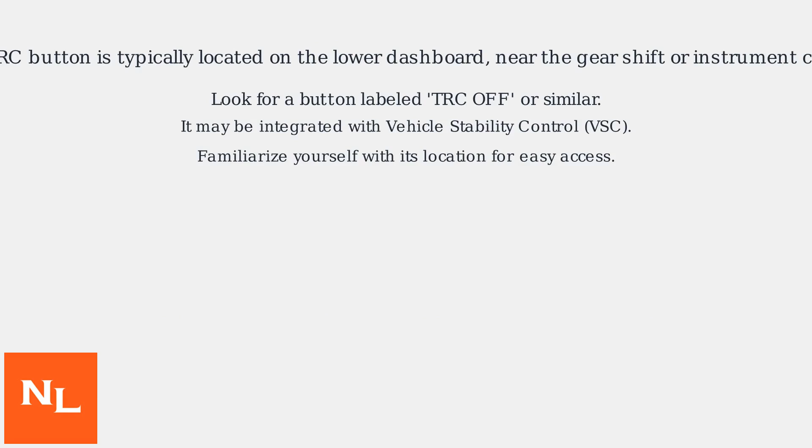The TRC button is typically located on the lower dashboard near the gear shift or instrument cluster. Look for a button labeled TRC off or a similar designation. It may be integrated with other controls, such as the Vehicle Stability Control (VSC) button. Familiarize yourself with its location for easy access.

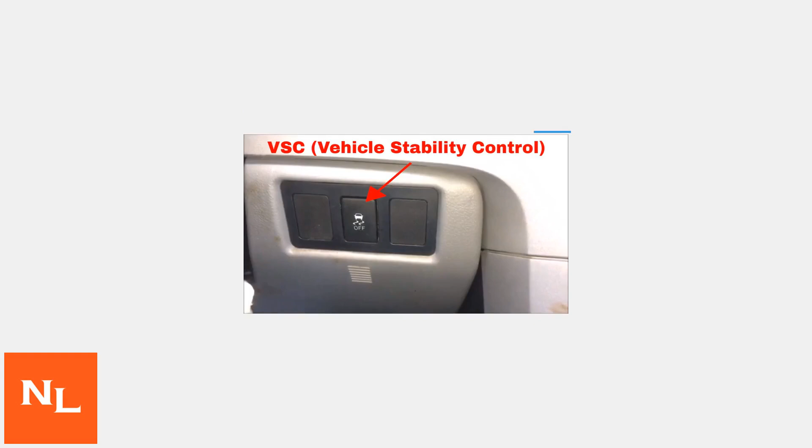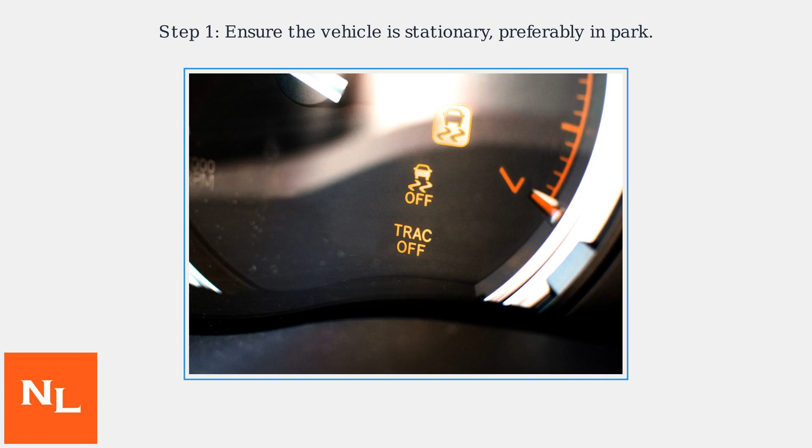To disable TRC, first ensure your vehicle is stationary, preferably in park. Then, press and hold the TRC off button for 3 to 5 seconds. An indicator light, often amber and shaped like a car with skid marks, will illuminate on the dashboard, confirming that TRC is deactivated.

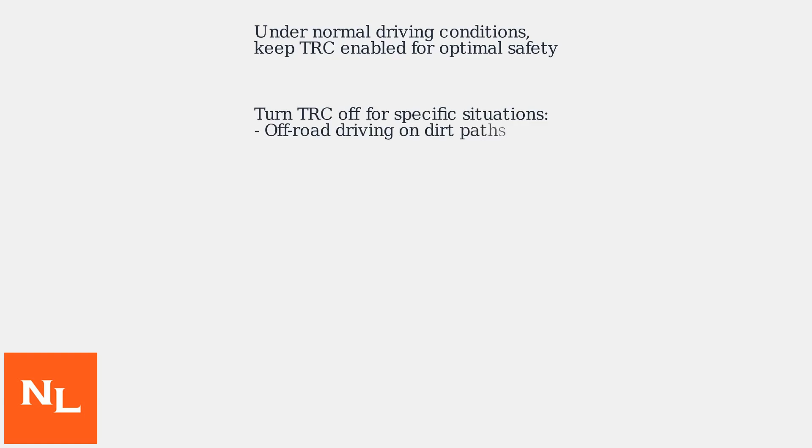Note, disabling TRC can reduce stability, especially on slippery roads. Turning TRC off is generally recommended only for specific situations, such as off-road driving or when attempting to free the vehicle from snow or mud, where wheel spin is needed to gain momentum. Under normal driving conditions, it is best to keep TRC enabled for optimal safety.

To re-enable TRC in your Toyota Yaris III, simply press the TRC off button briefly again. The indicator light on the dashboard should turn off, signaling that the traction control system is now active and functioning properly. Always verify that the light is off to ensure the system is fully engaged.

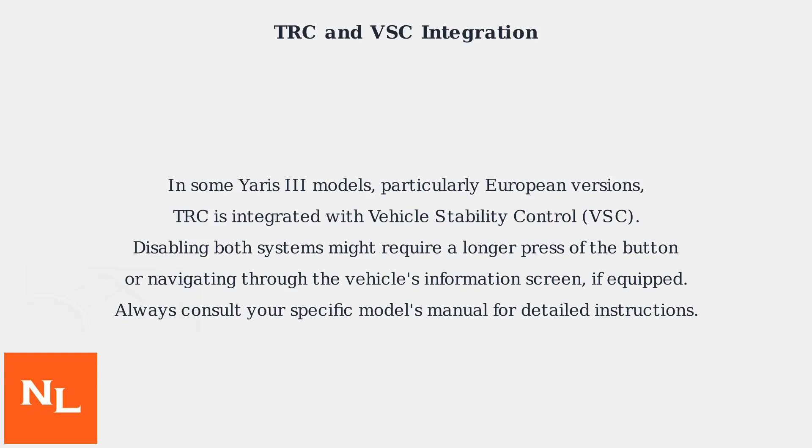In some Yaris III models, particularly European versions, TRC is integrated with Vehicle Stability Control. Disabling both systems might require a longer press of the button or navigating through the vehicle's information screen if equipped. Always consult your specific model's manual for detailed instructions.

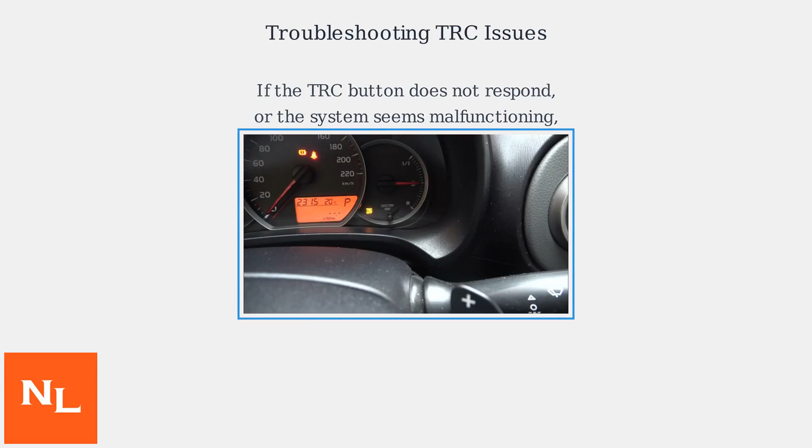If the TRC button does not respond, or if the TRC system seems to be malfunctioning, it may indicate a software glitch or a faulty sensor. Consider getting a diagnostic check, especially if your Yaris III is a pre-2015 model, as Toyota has issued service bulletins for software updates to address these issues.

For everyday driving, keeping TRC enabled is the safest option. Disabling TRC should be temporary and only done when necessary for specific driving conditions. Remember to consult your Toyota Yaris III owner's manual for the most accurate and model-specific instructions.